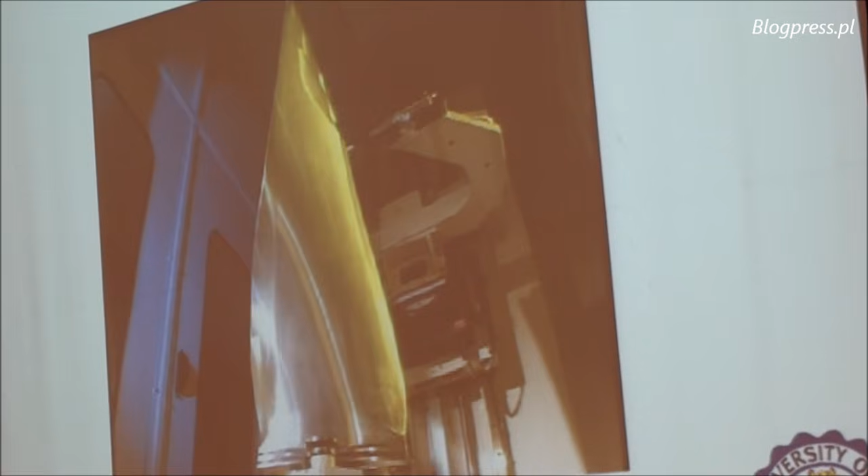This is required by the FAA, and you can see here the test that every jet engine has to pass. It's called the blade-out test for jet engines like the GE90. It costs more than $20 million. This particular test is for a Rolls-Royce engine and is conducted in England, but the same test is done by other companies like GE, Honeywell, Pratt & Whitney and others. As you saw, the test was very quick, just a millisecond.

Of course, we use high-speed cameras to videotape that, but even with high-speed cameras, we can only see a little bit of the action. It's very hard to measure, I think because of the energy involved in those tests. So you can imagine that basically the prototype of the engine, which is expensive on its own, is basically destroyed during this test. Now, as I mentioned, this is the required test for certification.

So companies have to do it, but they don't like to do too many of those tests. If they can limit it to one or two, they are very happy. If the test doesn't pass, they have big trouble, because then they have to go back to the drawing boards and continue making modifications to the design, slowing down the delivery of the product, which costs even more money. So what they do is over-design. That's normal. But if they over-design, the engine is heavier, and we all pay for that, because then the tickets are more expensive.

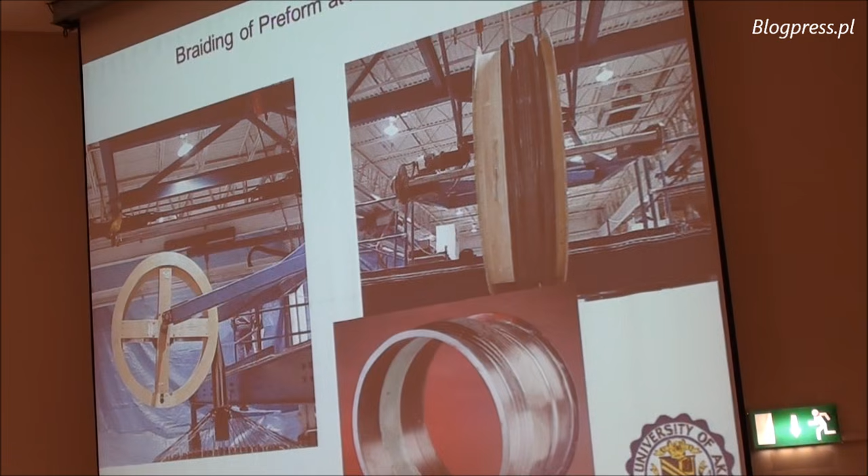So we have started to develop technology from the material point of view, that we have to characterize, understand, be able to describe mathematically and physically through a system of tests, and then develop the fabrication process that will be automated, so that the system can be done again and again with the same quality.

And here at the... oops, okay. Here it's... my laser is not working. Okay.

So the one that I was trying to shine is the containment, as you can see. Okay, this one. So this is the containment system, and basically it's flying with the engine, and it's a dead weight until it's necessary to stop this fragment of the blade to penetrate the engine, and of course to protect the wing of the airplane or a fuselage of the airplane, and make possible, even in such situation that the blade is broken, for the airplane to land.

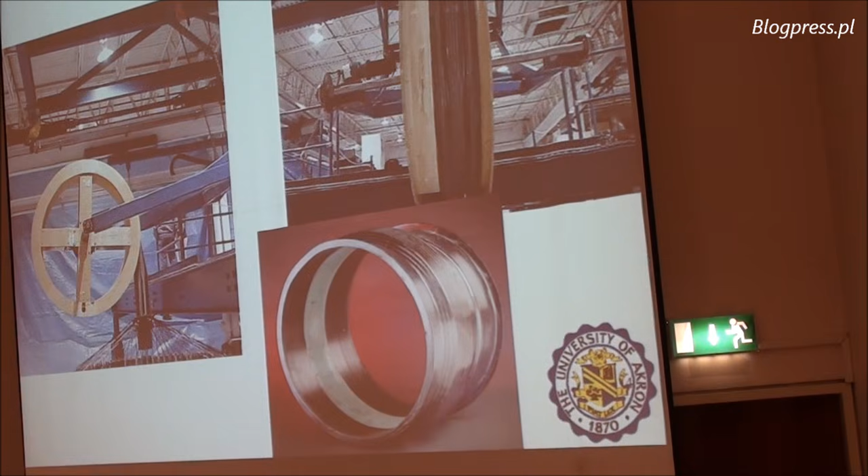In order to understand the whole system, we had to look into it from the material point of view, of the micro level, and meso level, and macro level, and also on the structural level. So this is the so-called multi-scale approach, and required to analyze and characterize the polymer itself that is used as a matrix in the composite, the composite itself from the micromechanical point of view, then understand the architecture of the material, which is the mesomechanical level, then go into laminate, which is the macromechanical level, and make a structure, which is the structural level.

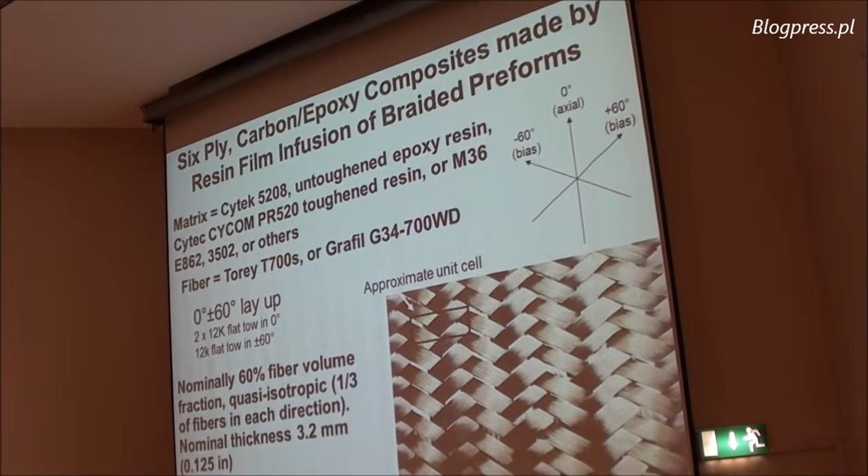We use different matrix materials and limited ourselves to Toray T700S fiber, which is Japanese fiber. And you can see architecture, and again, the same architecture is seen here in the sample, which has 3 directions of the fiber. 0 is embedded inside of these bundles, and plus minus 60 braided over and under through the system of braiding. So this, in mechanics of composite, we call it quasi-isotropic material. It means that from the point of view of theory, it's supposed to have the same properties in axial direction, which is this one, as in transverse direction.

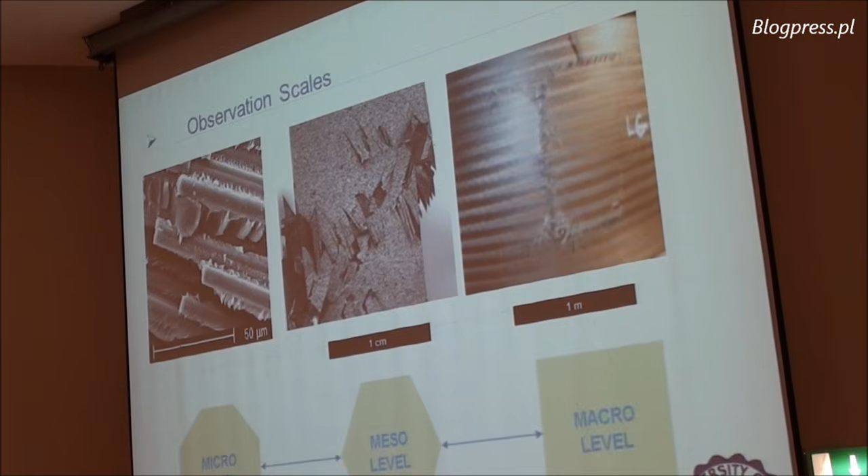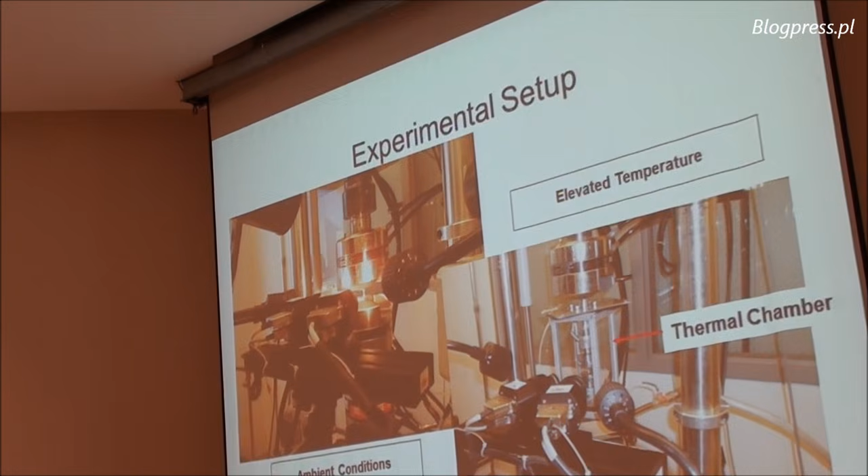Of course, when we test, you can see that at different level, we will focus on different mode of failure. We can see at the micromechanical level the adhesive or cohesive fracture of the material itself. We can see from the sample level the tension results, which looks like shear, and from the structural level we can see the damage due to application of the internal pressure, which makes the crack driven by the structure geometry of cylindrical structure itself.

So in order to characterize the resin material, we developed special small samples that we could get the results under tension, compression, and torsion for the shear. So we had a small cylinder, and we used a digital image correlation technique to observe the deformation of this material. I'm sure in your university you use digital image correlation widely. It used to be an advanced method of measurement, but right now it's very common, so I'm not going to discuss that.

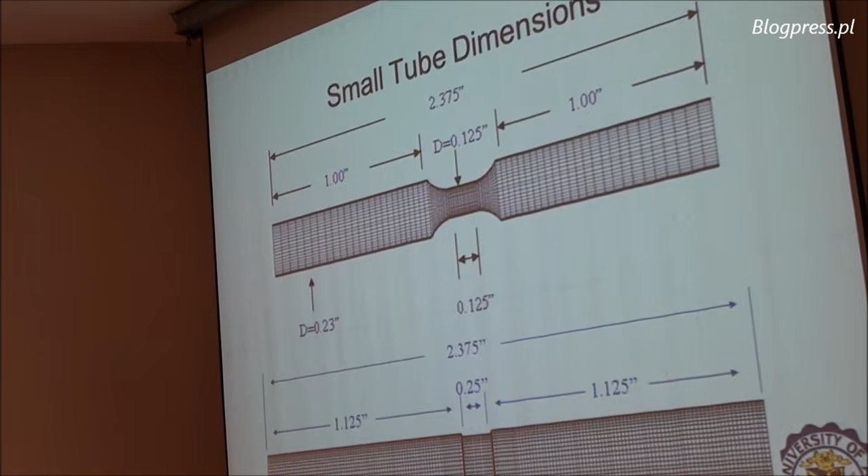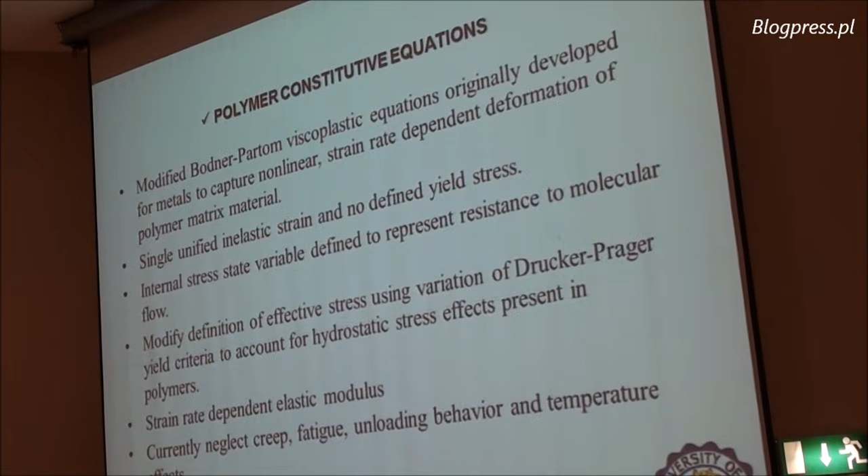Now, because of the viscoelastic properties, if you load and unload, you can get hysteresis of this test, which means some of the energy would be absorbed through just loading and unloading. And all of that is important because we eventually have to develop the constitutive equation that would describe this behavior of the polymer composite that we use in this

material application. So we use the modified definition of Drucker-Prager yield criterion to account for hydrostatic stress effect present in the polymers and strain rate dependent elastic, and basically this is some mathematics that describe the stress strain using the compliance matrix and the functions that are used in the constitutive equations. I'm not going to spend all the time, but basically this is quite simple for the constitutive equation system, but still has 7 parameters that need to be determined experimentally.

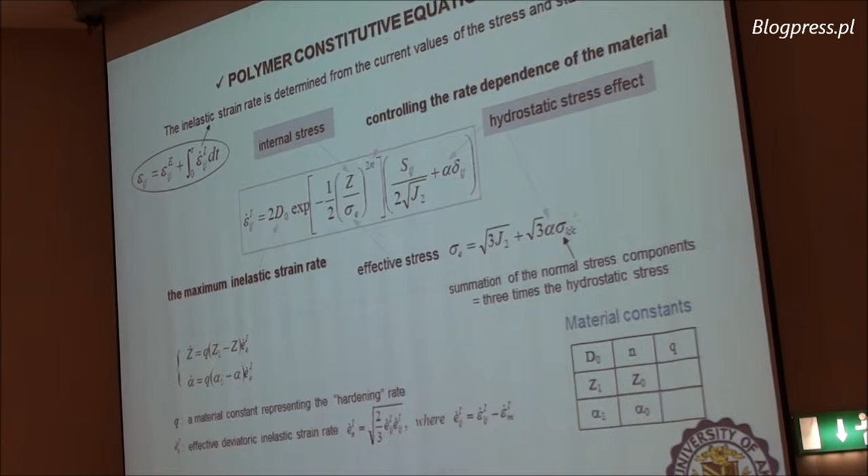And of course this is not finished. We also had to add some damage that is involved in the material itself as a matrix. So the damage is reducing the Young's modulus. You can see that the more the damage, the different slope, even at the beginning of the stress strain curve is obtained, and that needs to be related mathematically, and it was captured using the damage parameter, which is basically defined using Kachanov type of definition.

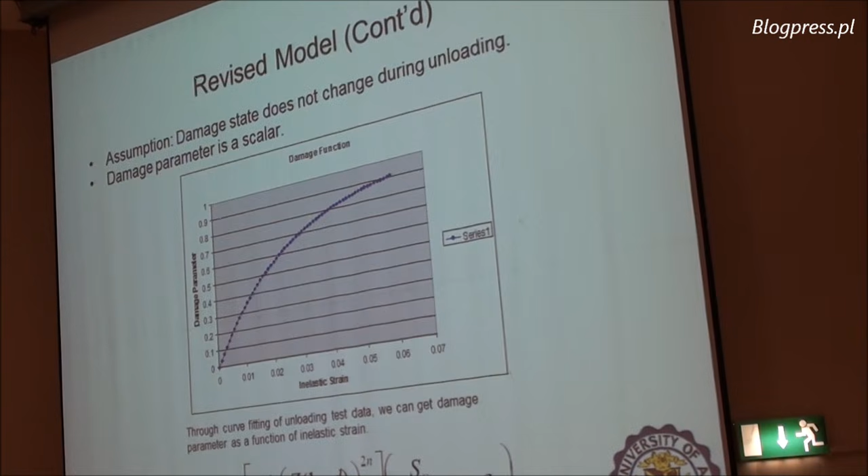The revised model is described here by this equation, where you have effective strain and damage parameter involved in this equation, and therefore you can have the sensitivity to the behavior of the material, not just as a virgin material as it is new, but also when it is damaged.

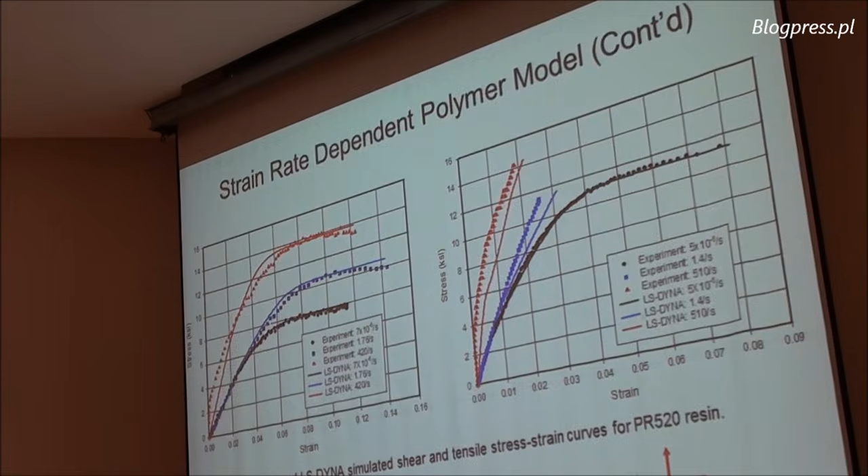And we developed UMAT for LS-DYNA, which is basically a system of steps that will incorporate this model into the finite element calculations. And the bottom line is to have experimental data and simulations, and convince yourself that yes, you capture the behavior of this material at different strain rates, and you have it that you can use, you can move on to the next step of the analysis.

One addition to the behavior of the resin material is that it unfortunately suffers aging during the lifetime application. So it means that when we produce the composite and we put it into an airplane and it flies and changes temperature from the temperature at the tarmac to the cruise temperature, which is very cold, and then lands maybe in Hawaii and it's very hot and humid, or in Dublin, which also could be very humid. Then all these conditions and application of different gases can

deteriorate the material behavior. So we were asked to use our laboratory, and we have a special environmental chamber where we submitted this material to the aging process, and we tested again and again after months, 2 months, 1 year, 2 years, 3 years, 4 years, and find out if this material is going to behave properly at the end of life. Because for the designer people, it's easy to get the properties of the material when it is produced. You can go to the laboratory and test just after fabrication.

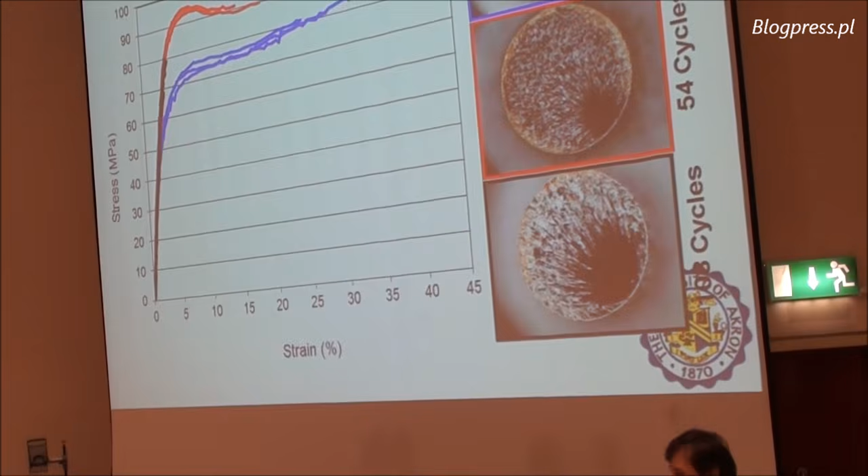But as a designer, you have to design the part, the structure, at the end of life, because it has to efficiently behave and do the job at the end of life, not at the beginning of life. So we found that indeed the aging is changing properties of resin from very elastic plastic to less plastic and to very brittle material. It changes also the color, as you can see through the cross-section of the broken specimen.

So once you understand the limitation and behavior of the resin itself, then you can go and make a composite, and then you go and try to test the composite. Of course, from the testing point of view, there are ASTM standard tests. I don't know what test you use here in Ireland, but in the United States, ASTM is the way that we follow.

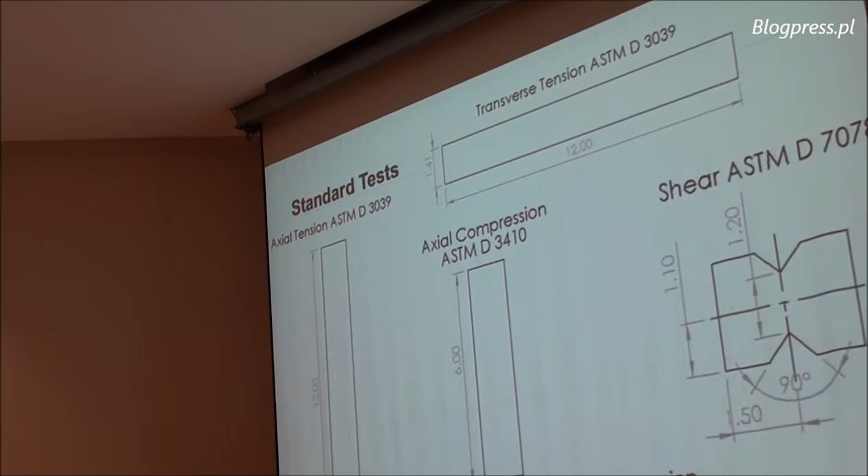Unfortunately, this is a coupon of the simple tensile test, and you can see that the outside edges basically cut through the bundles that are plus minus 60. And this has, we found, a consequence on the results of the tests. So we had to develop a new test outside of the ASTM standard, and we were looking first of all to understand the so-called edge effect, and you can see this edge effect in the DIC methodology.

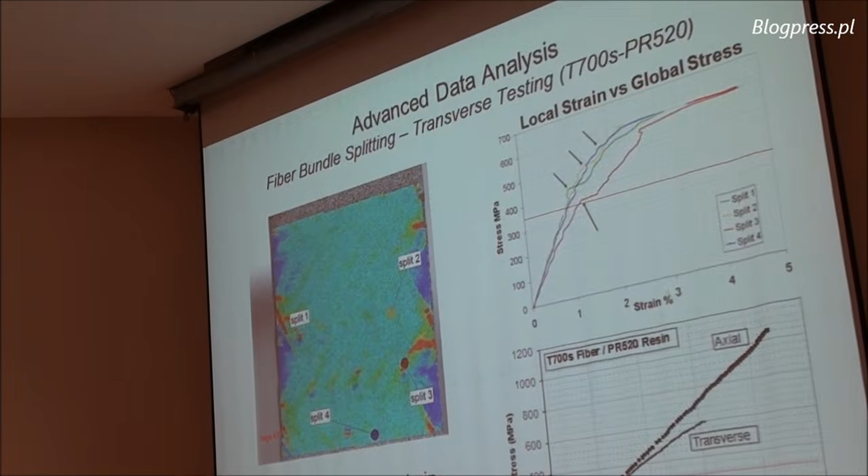This is an experiment where you can see the edge effect, which gives different stresses than they are inside. And of course, non-homogeneous stresses or strains are visible, like you can see maybe a damage, local damage, split or fracture or debonding between fiber and matrix. All of that can be overlapped on the global strain, but locally they produce a different stress-strain relationship, and they need to be known and somehow incorporated into the constitutive equation later in the modeling.

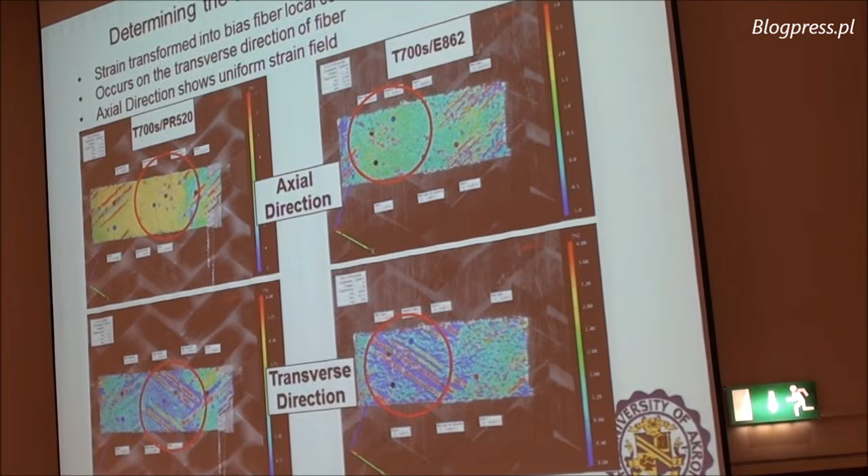So we spent a number of years to understand the different failure modes. We found through the thickness the splitting of the bundles that are shown circled, and we looked at the microscope, we looked at the bonding at the fiber level, and we found that even for the same fiber, but two different resins, which globally give almost similar behavior, the local stress strain can reproduce different damage progression or behavior of the material itself.

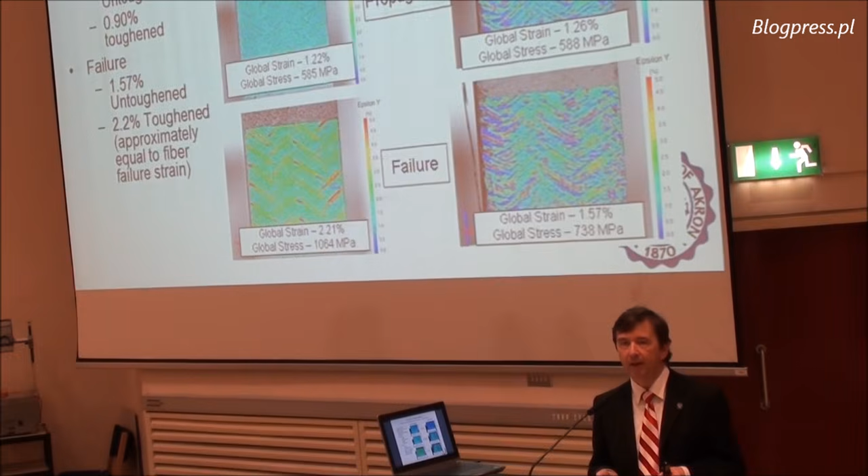We attribute that to the interface. Okay, we can have material with a strong interface that is on the left, and with the weaker interface which is on the right. So although we combine materials that physically behave almost the same, because of the interface the effect could be quite different.

And again, a lot of tests showing the mode of failure under tension, and these are pictures from the high-speed cameras that show how quickly, this is 40,000 frames per second, so within 12 frames of the 40,000 frames per second, you can see the damage progression. So you have to capture that very quickly, otherwise you don't see that at all.

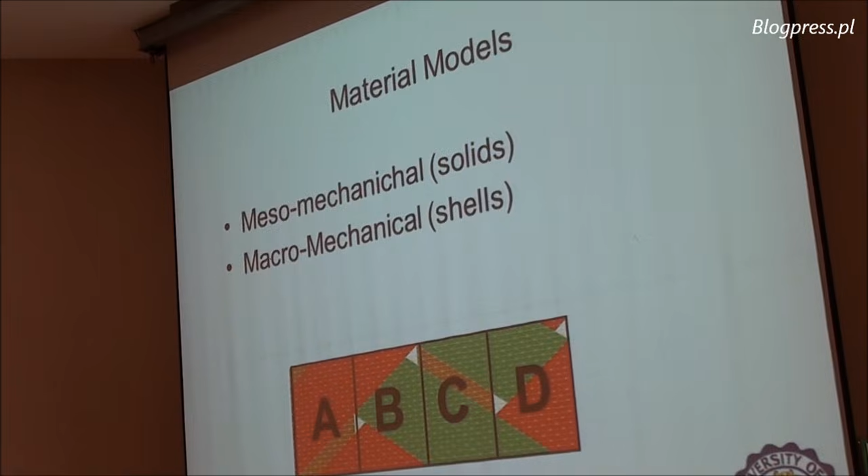And then all these tests are put together in the mesomechanical model, which is shown here, and macromechanical model. For the macromechanical model, we divided the braid, the so-called representative volume element, into subsections A, B, C, D, and in subcells A and C there are fibers in plus, minus, and 0 degrees orientation, and B and D are plus, minus 60 different orientation.

For the mesomechanical model, the idea was to use solid elements. For the macromechanical model it was to use shell elements, and of course a shell element will lose some of the information that the solid element can provide, but for the structural analysis the shell element is the proper way to do it, not solid elements. So again, contributing this to the model with the cohesive element used to measure the strength of the interface. And of course, those people who understand fracture mechanics know mode 1, mode 2, mode 3, and they are all captured in the cohesive element.

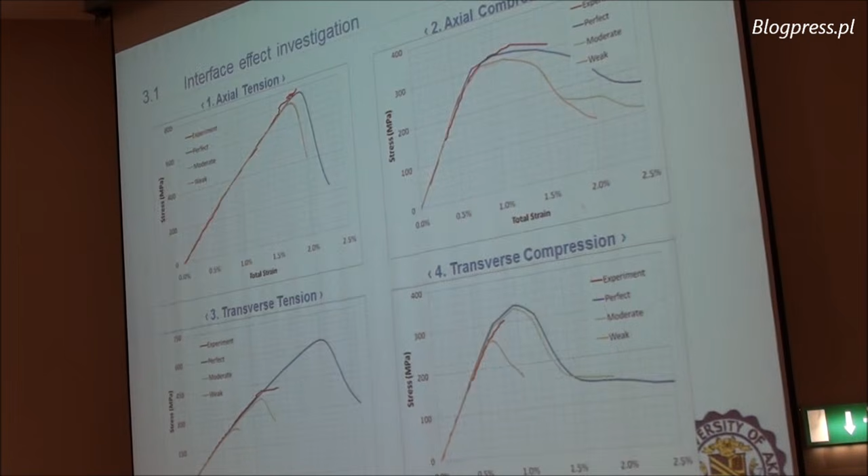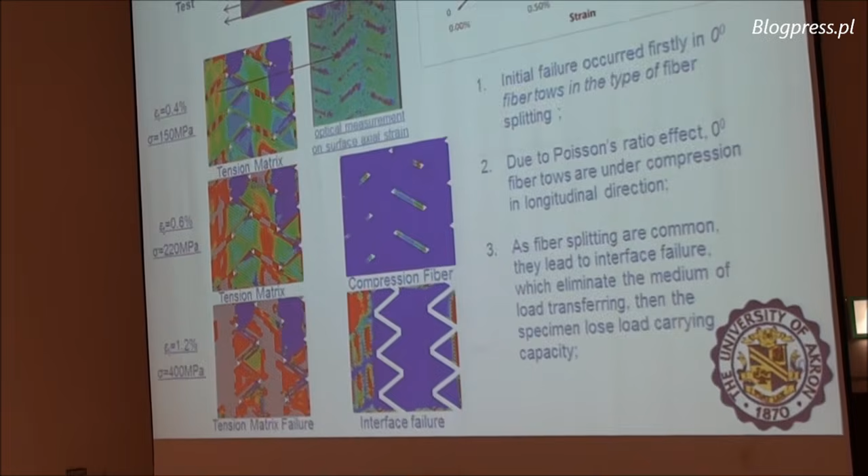And the bottom line is that you then have a significant number of parameters you can adjust to make sure that the simulation, as you can see here, for axial tension, transverse tension, axial compression, and transverse compression will capture the experiment as measured in the laboratory. You can also look into the analysis and try to understand if you capture not only the slope of the stress-strain relationship, but also the damage, and this is on the left simulation and on the right experiment, which indeed captures those failures that occur in the material itself, and again other tests are shown here. Same thing you do for the macromechanical model, and eventually you can get the tests and samples that give good results.

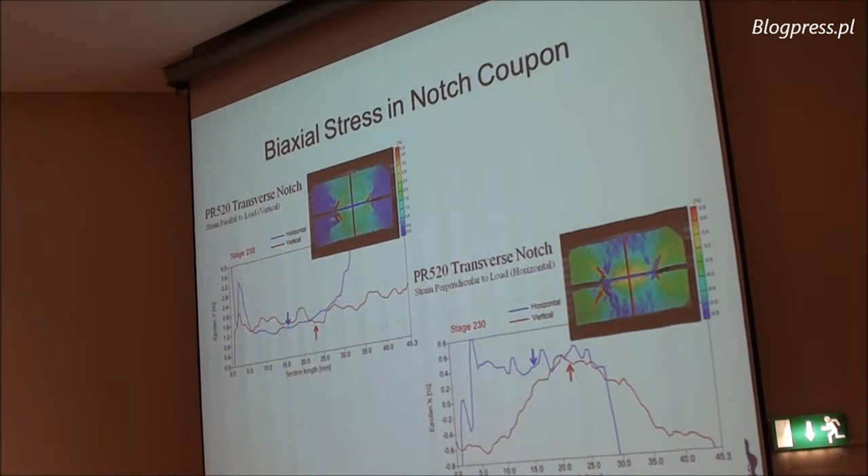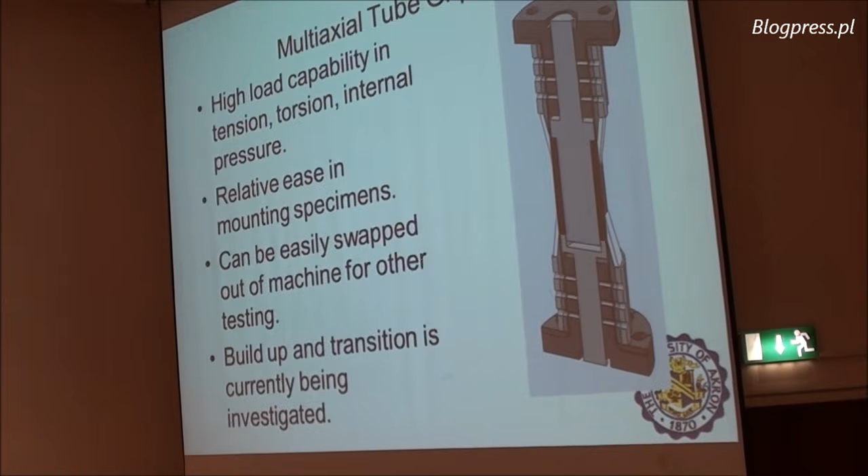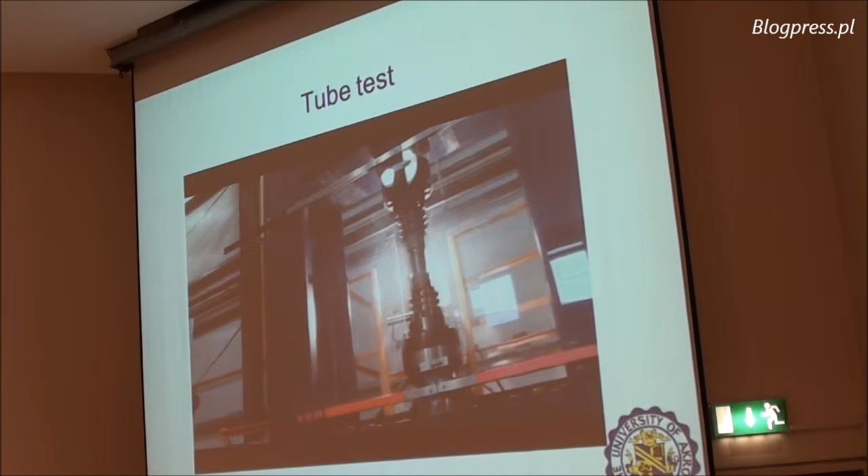This is showing some video of making the gripping area, which we had to overlap with extra material and then machine it. So that takes a lot of preparation time for each tube, and you can see now the test itself in the machine. You can see my graduate student sitting behind and controlling the testing process. And pretty soon you can see two cameras measuring through DIC these spots that are painted on the surface of the specimen, which are post-analyzed in the computer to show the strain fringes.

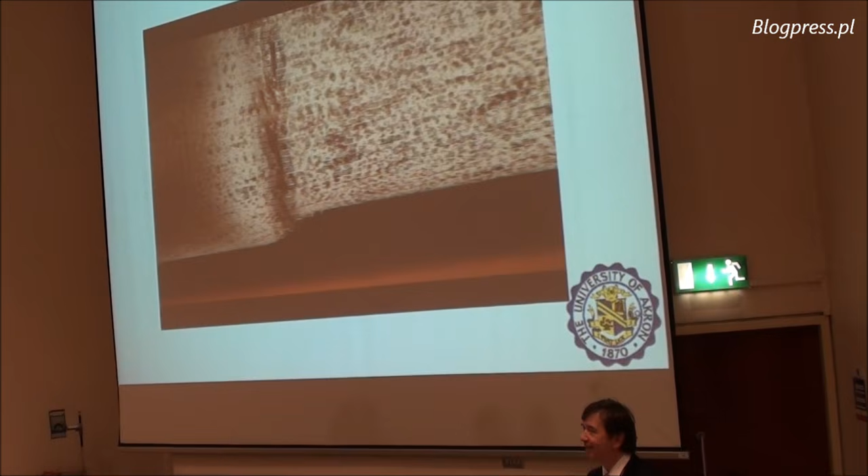And I'm just shaking hands with my camera, waiting for test results, and worrying that if it explodes, because it may explode, I will be full of shrapnel. But what we do for science, right? We devote our life and make sure that we can get results.

In this case, it was safe because it debonded at the gripping area, so it didn't break, and the results need to be repeated anyway later on. So in terms of static tests, these are the capabilities of our laboratory. We can do the ASTM standard tests or non-standard tests, but we also have the gas gun that you can see here, so we can test the material under impact conditions. That will give us the larger plate that is impacted under the... let's see if I can.

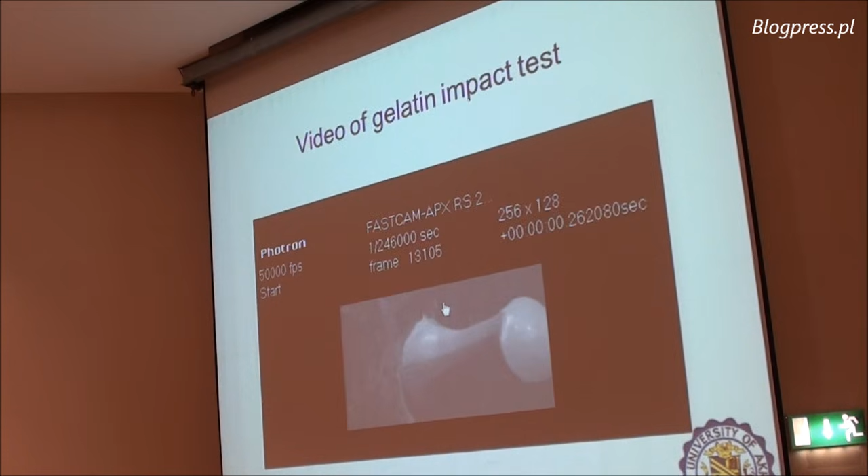This is supposed to be a video, so here it is. So you can see the gelatin is splashing into the material, and we have to characterize the projectile. In this case, it is gelatin itself. Then we look at the gelatin using the DIC method, and then we can apply the DIC to the

test itself. This is an interesting test because it will show how aluminum, the original material, will behave under the gelatin, which is the so-called artificial bird. Well, here you are, it breaks through, and not only does it break through, but it rips open a huge hole. So aluminum, as a standard material, is very dangerous because yes, it is elastic-plastic, but if it breaks, it can open a significant hole in the engine, and therefore those cracks are not arrested.

And you can see on the left the deformation of the aluminum before it fails, at a little bit higher velocity, and it failed, and the failure is definitely very detrimental. Now, the composite offers more crack resistance, so when you have a failure, you have local fiber breakage, but even if you have a, let me see if that would show.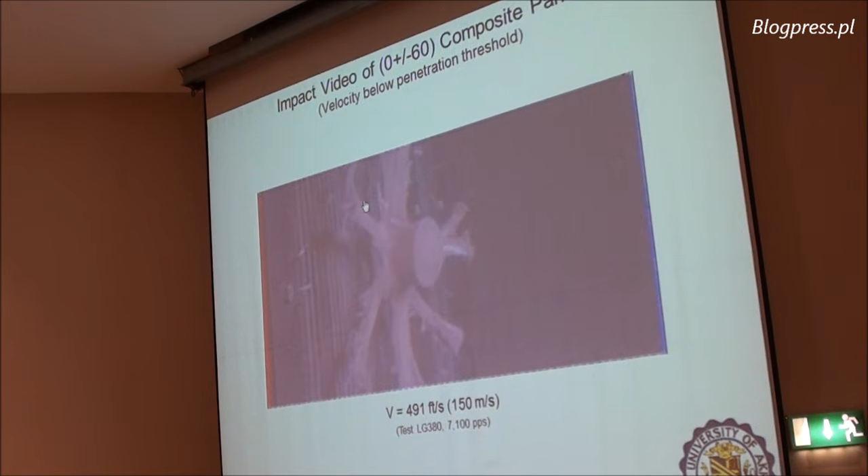Even if we have the application of this material, you can see it is more elastic, it is gentle, it behaves like a spring, and therefore saves itself. And it was interesting to me that common sense would be that if you have thicker material, you have more protection. In fact, in composite, the thinner material, to a certain extent, gives you more protection because it's more elastic, and therefore the damage is not as strong, and that was analyzed through all this

analysis. If it fails, of course, because you can always apply force that will fail it, the damage is much more localized. It basically breaks and opens the gate, and the projectile flies through, and therefore the damage is not as bad as one would imagine.

You have here the whole matrix of damage, and you can see that for the same fiber, just by changing the matrix, the so-called V50, which is the velocity of penetration, can be significantly different due to the interface strength. In fact, again, common sense would tell us that the stronger the interface, the better.

In fact, in impact, the weaker the interface, the better, because the material starts to spread the forces through itself by delaminating or decomposing itself, and fibers, by pulling from the matrix and from the other fibers, can absorb much more energy, therefore it can get much safer for the experiment that we use.

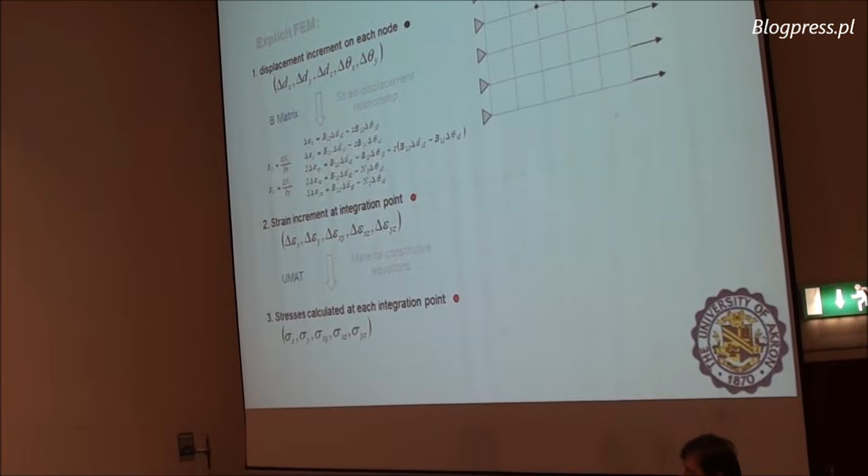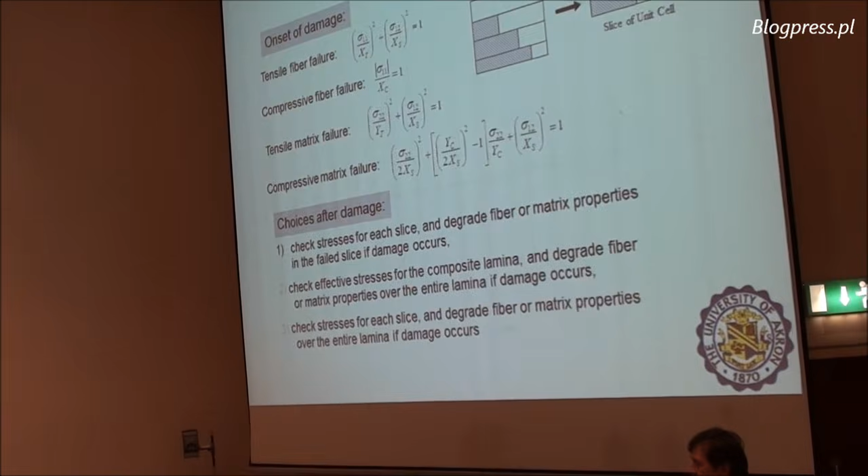This is the system of UMAT applied at the integration point, which basically takes the behavior of the resin and failure using the micromechanical model, and these are the results of the simulation with respect to experiment, which are satisfactory for us. And again, you can see the damage model using the so-called slice model that we use to incorporate and get the final results.

Once we can get the results not only for the deformation, this is experiment, this is simulation, but also for the shape of failure, then we are very happy, and we can start making changes to the orientation or architecture of the composite. And over here we have plus minus 60, and we have the so-called butterfly shape of the damage. Here we change to plus minus 45, and a completely different shape of the damage, which was predicted first and then tested, and indeed it was confirmed that the damage is like that.

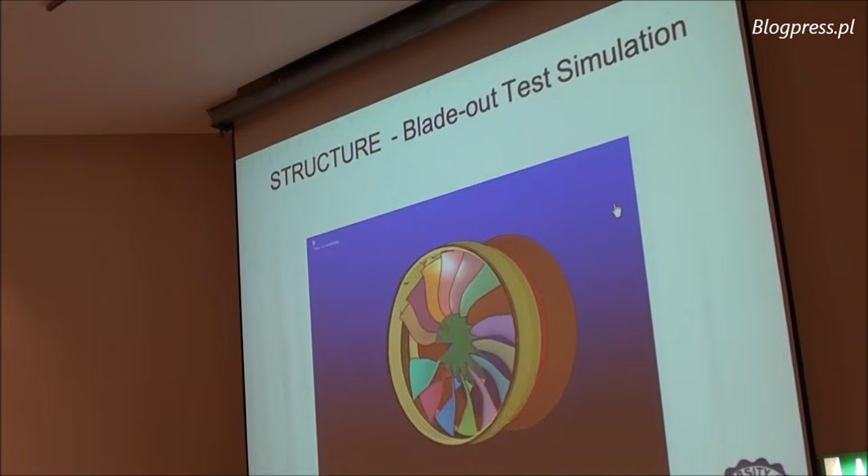Now the result of this is structural analysis, and then a $20 million test can be done on a computer, which is almost free, because this is the cost of graduate students, and you know how little we pay graduate students for their work. So it's indeed the time of computers and simulations, and we can get more information from simulation than from the experiment, and therefore the FAA is very happy,

the aircraft companies and jet engine companies are very happy, because now they can make modifications, they can come closer, they don't need to over-design the structure, and they can save more weight, and we were able to save 30% of the weight of the jet engine by using this technology in terms of composite materials, and also using our simulation method, which is a big success for a small jet engine company like Williams. They lost a contract for small business airplanes because of 2 pounds overweight of the jet engines.

Then they came to us, they use the same material for their jet engines, they save enough weight, and they are competitive again on the market. So by doing this, we can save and allow companies to compete and save billions of dollars in terms of production over the long term.

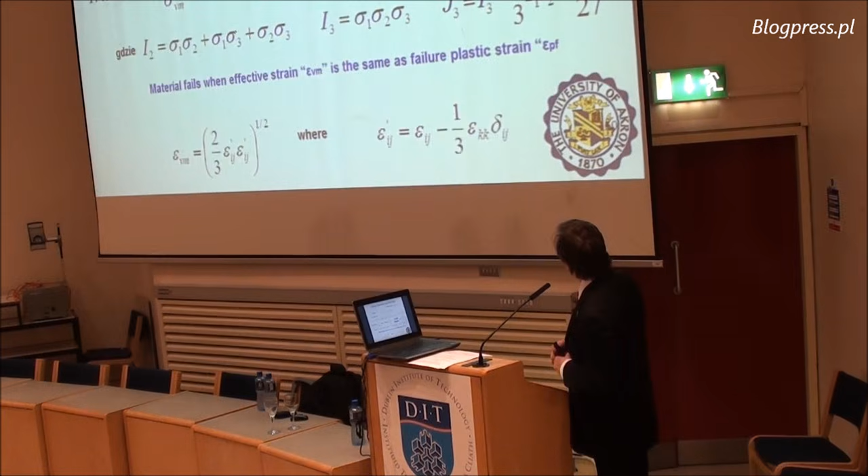which is the effective stress. So, of course, this can all be described using invariants, and again, I'm not going to spend too much time on the mathematics, but I just want to point out the triaxiality and the so-called Lode parameter. This one, the Lode angle, defined using the J3 invariant, is used to describe the behavior of the aluminum.

So the aluminum is isotropic, but we found that based on different triaxiality, it behaves at failure in a different way. And this can be shown by experiments under tension with grooves on the left, tests 1, 2, 3, or a punch test. And of course that can be done, similarly to composites, using different strain rates.

So what is interesting is that we can see at 20C under different rate conditions, the red is the fastest, that the faster we apply load, the stronger the material is, and also unlike in composites, the maximum strain is not deteriorated, which is very, very good for aluminum.

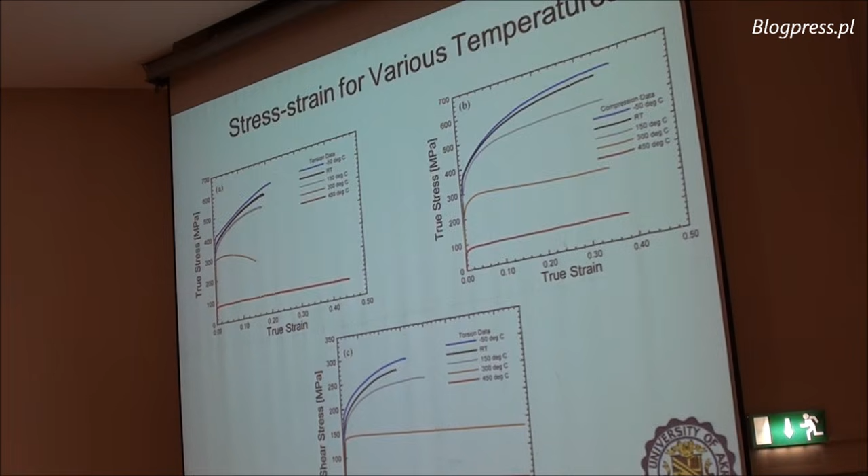Now also for the same strain rate but at room temperature or low temperature especially, the low temperature is the blue, minus 50C, which is the cruise temperature of the airplane at 30,000 feet. Or room temperature, you can see that again the colder the material is, the stronger it is, and still not losing any of the strength.

And we can again observe experimentally, and we developed a special specimen. This is a special specimen with a punch, and that punch expands the size of the specimen, at the same time pushing the bottom and therefore producing a three-dimensional state of stress at the bottom, tension in X and Y, and compression through the thickness. So this is the negative so-called Lode parameter or Lode angle and negative triaxiality.

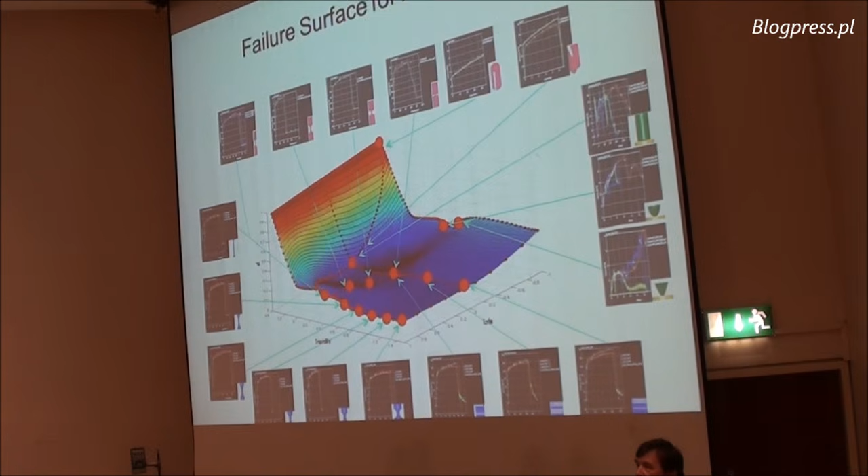Now, all of these tests shown at the outside of this slide are needed to produce the so-called failure envelope. So this is the failure surface for aluminum that shows how dramatically different failure can be depending on the combination of the state of stress that you apply to this material. Once this material is characterized, it is put into LS-Dyna as a so-called tabulated material model 224, which means that the experiments are completely embedded in the numerical model.

And we can see that we can capture the ballistic test for different thicknesses of the plate on the left and compare with the experiments on the right very accurately. Same thing for tests that are different than ballistic. And I used this material to find out whether it is brittle at higher velocity. So we use a sabot, and this is our gas gun in our laboratory, and you can see the result of the impact when the sabot is accelerated in this tube and impacted into a very thick wall. So this is like a rigid wall at the speed of sound.

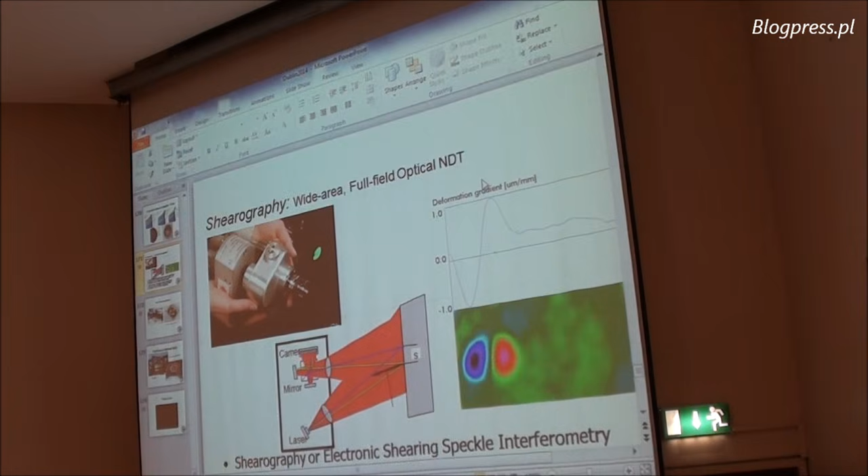So from this you can damage this aluminum completely, but there is no brittleness. The material basically is very plastic, and we can also capture that using material 225. So all of these tests will allow me now to go to the next step of my presentation, which basically would be applying all these material models, both aluminum and composite, and because wood is a composite material, we can get the same.

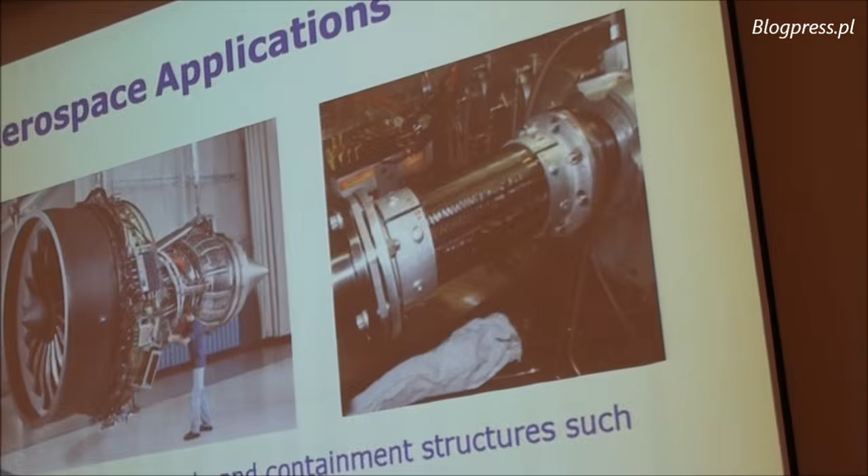And at the beginning I showed this is the new GEnx engine that was produced by GE that is used as one of the options, in addition to Rolls-Royce, for the Dreamliner. And of course it is available for other airplanes as well. The same material, if it is good, is now designed and used for helicopter shafts, so in the future there will be more applications. But let's go to the problem where I would like to apply my knowledge, the methodology that I described here, which involves the crash of the Polish government airplane, which happened on April 10, 2010, where the President of Poland and many officials died.

And I'm sure you heard about that. So, based on this methodology, which by the way was used also to analyze the crash of Shuttle Columbia before, I knew that this would be a good methodology to use to analyze some aspects of this crash.

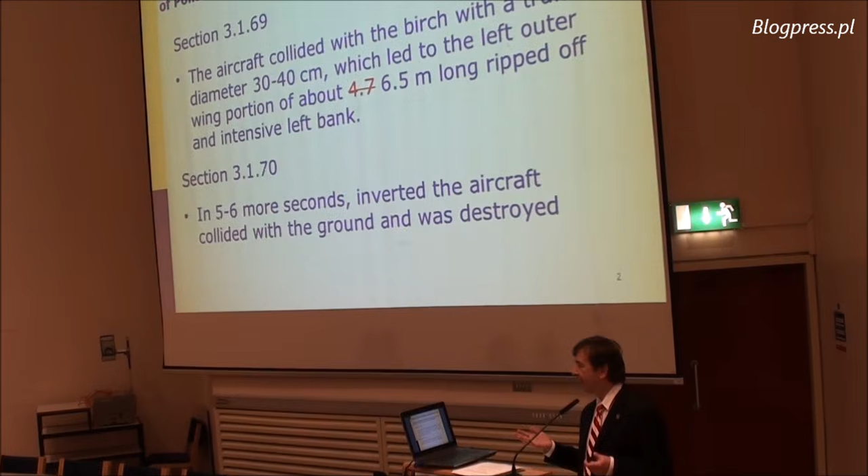So I was waiting for the official report, and you can read from it, in section 3.1.69, that the aircraft collided with a birch tree with a trunk diameter of 30 to 40 centimeters, which led to the left outer wing portion of about, first they say 4.7, then they measured 6.5 meters long, being ripped off and an intensive left bank. In 5-6 more seconds, the inverted aircraft collided with the ground and was destroyed.

We are talking about the aircraft Tupolev 154, which is similar to a Boeing 727, about 40 meters wingspan and 50 meters long, about 100 tons. Based on this reading, this is about 6 or 5 meters from the ground, as measured by the investigating committee. And they say that at this location of the birch, the airplane lost a wing.

And of course, when they lost the wing, you'd anticipate the plane would lose some energy, because they lost the balance of the lift force, so it makes sense that it goes down. But somehow then they said, based on the black boxes which measured the height, that the airplane was able to go around, starting to climb again without that wing.

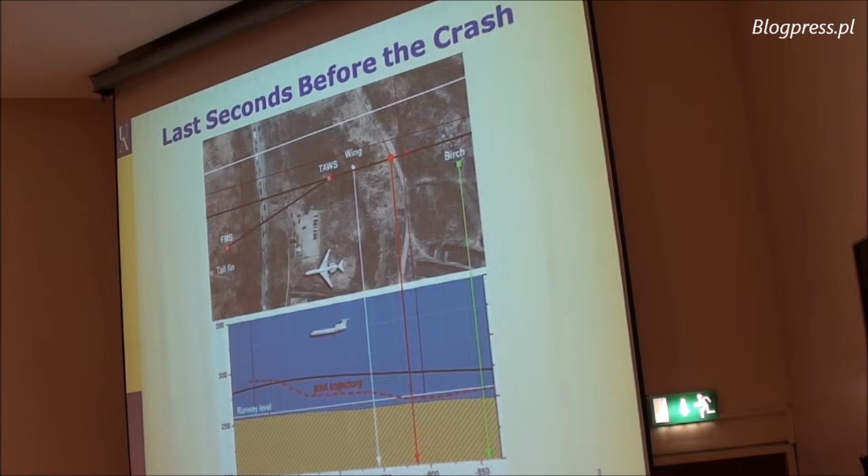And at this location, something happened, because this is the horizontal trajectory. By the way, this was supposed to be a real trajectory, but it was incorrectly directed by the ground navigation people, who directed it on the wrong path. But anyway, something happened, because the plane that was flying straight turned left sharply, and at this location lost all electric power.

That location, you can see, is about 30 meters above the ground, and this is from the Russian report. So you think about this and say, it doesn't make sense that an airplane going down without a wing, which makes sense, is now able to go up again. And you calculate - anybody can find that the airplane is flying 80 meters per second.

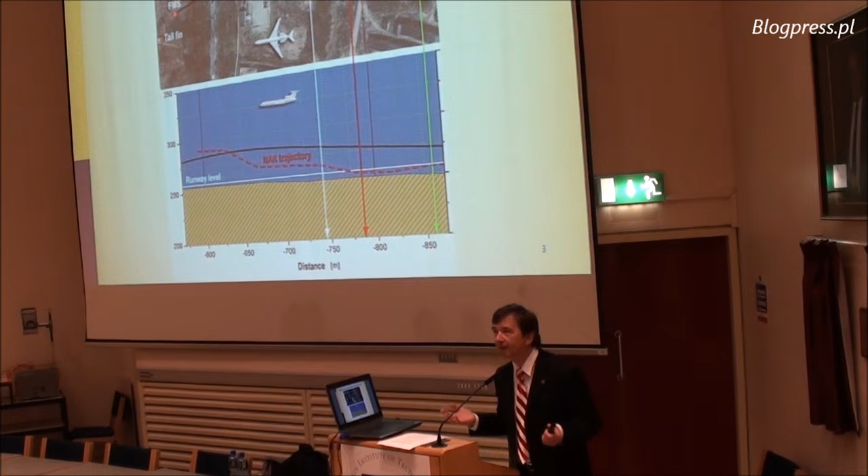You can see the distance in meters, so you can calculate the change of velocity, and you find that at this location where the velocity changes from going down to going up, the g-force has to be about 10 G. So it is physically impossible, because even fighters cannot get G10, and big airplanes with G10 would just disintegrate at that location. So you would say that something is wrong.

And we've been looking into this for many years, not only us. Recently in Denmark, a Danish expert, Glenn Jørgensen, made calculations, and this information is on YouTube. His lecture was in Denmark, done in January.

You can see that, in fact, he had the same motivation as I had - I wanted to prove that the original report is correct, and I just wanted to verify that with my methodology, and he also wanted to do that. And when he put in his time and I put in my time, we found that the report has no sense whatsoever.

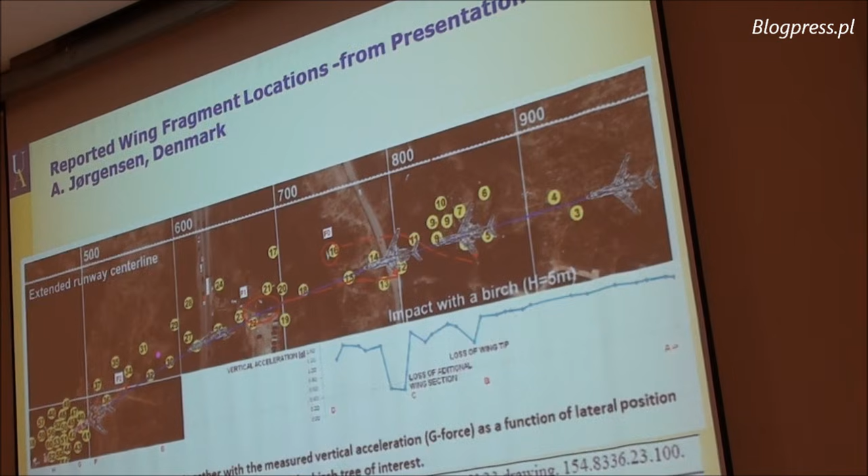So what he's saying is, okay, this is the location of the birch, and let's say the airplane lost 6 meters of the wing, and one wing is 18 or 19 meters long. So 6 meters is about a third of the wing, and that part of the wing is here - it's flying from the left somehow to the right of the center of mass of the airplane, and landed in the bushes and trees, visible through the satellite picture.

But he also found that other parts of this wing are in shrapnel shapes here, and this is the location of the first contact of the airplane with the ground. So the question is, what could happen that the other third of the wing is in shrapnel form somewhere in the middle, when the airplane was definitely still flying, because this is the mark of where the airplane first touched the ground.

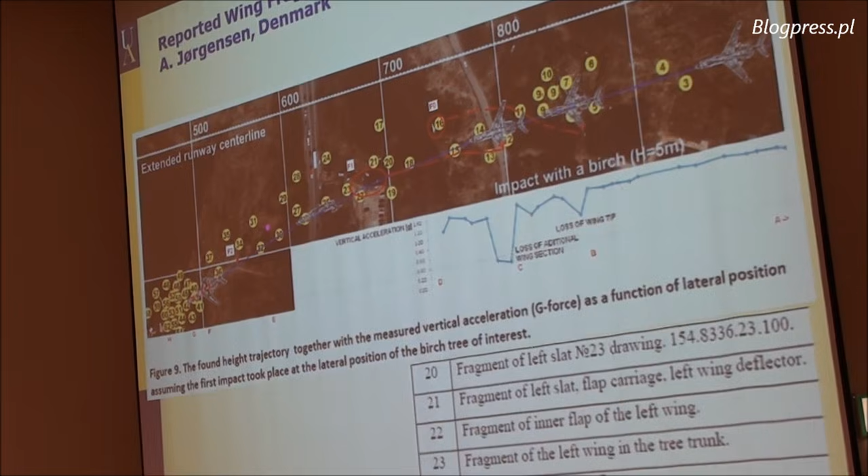So he also looked at the black boxes, and he found that at that location, a little bit before the first and second debris, there are two dips in the G-force, which could be related to the loss of this wing, and therefore loss of the lift force.

We also found, through analysis of the satellite pictures, that until now, almost 4 years later, no person from outside of Russia has any access to the debris of this airplane. Although it was a Polish governmental airplane, it is still in Smolensk. All the black boxes are still in Moscow, and nobody from outside of Russia has any access to the originals. There are some parts smuggled by people, which happens, but officially they are not available.

So what we found is that on the 11th of April, this is the part of the stabilizer, and this is the location of the first touch of the airplane. You can see the grooves done by some parts of the airplane in the ground. This part, from the 11th to the 12th of April, was moved by some unknown forces by 50 meters. So we asked the Russians what happened, and they first denied it, saying this was the original location. But when we presented pictures from the satellite, they eventually agreed and said people were trying to steal those parts, and militia stopped them and dropped it there. So we asked, why does the official report mark the new location, not the original? They didn't answer, saying this was a rude question. So they don't answer rude questions.

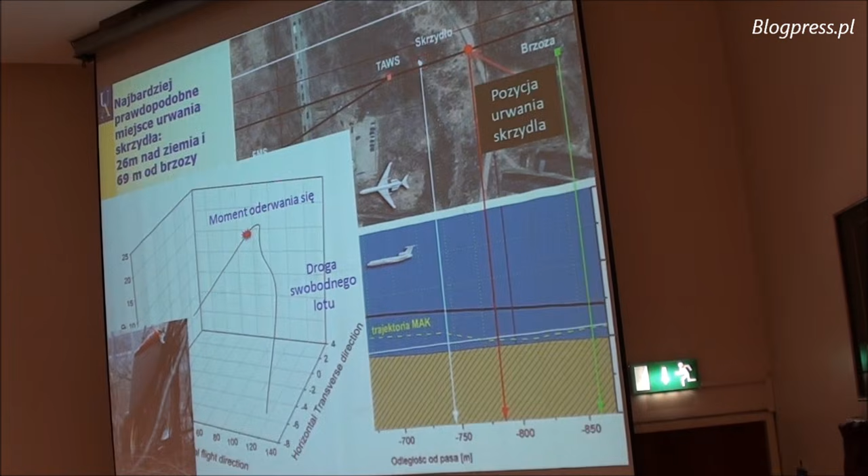Another scientist found that the TAWS measurements from this airplane were sent to be read in the United States, and we have access to that. This was one data point we had direct access to, and that TAWS gave a different vertical trajectory than the Russians showed. The original Russian trajectory supposedly had the airplane 5 meters near the ground, but TAWS shows the airplane never touched, never hit this tree at all. It was increasing height, so the pilots said we are going around, we are not landing, and they started to execute this go-around decision. However, something happened later that disintegrated the airplane in the air.

Coming back to Jorgensen, it's interesting because his analysis using aerodynamics is able to work back from the location of the first mark and find the trajectory, and he independently confirmed that the TAWS measurement is correct. In other words, if the airplane were at that location, it would not be able to reach the final destination itself. In order to get there, two things must happen. First, the airplane must be higher, and this was also compared by Dr. Kowaleczko, who did independent calculations and found 11.3 meters above the ground, which is way different than the 5 or 6 meters stated originally, and which agrees, by the way, with TAWS measurement. Also, Jorgensen says that in order to make that sharp left turn, you have to lose two-thirds of the wing. So indeed, you cannot just lose one-third of the wing, you have to lose two-thirds, which you can see from the debris laying before the location of contact with the ground. So all of this started to agree, no matter who did the calculation, either me, Akron, Jorgensen in Denmark, or Dr. Nowaczyk in Baltimore. Everything agrees. However, nothing agrees with the official report that was presented to the world.

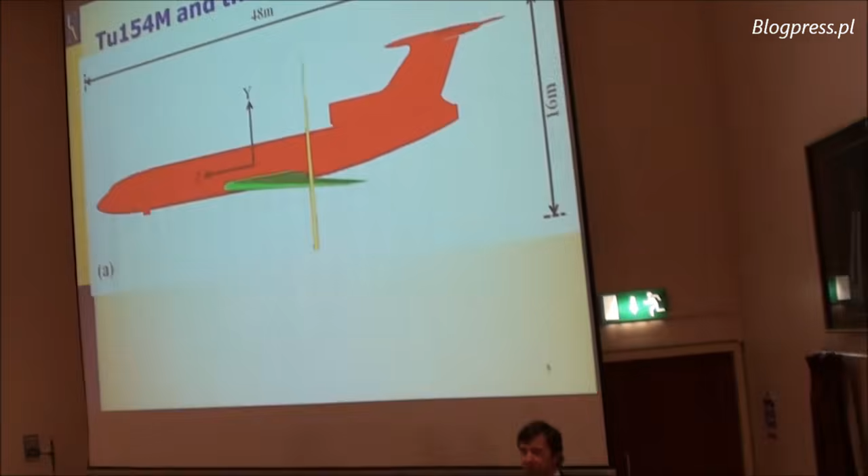Coming back to my methodology, as an engineer I can build a model—this is a model of the Tupolev 154. You have some measurements; you can see the yellow trunk of the tree according to the official report, which is the input data.

I also had to give the properties of the material. Professor Cieszewski from the University of Georgia received part of this tree from Smolensk and tested it, finding that it is indeed a regular birch tree, not anything stronger than any other birch tree.

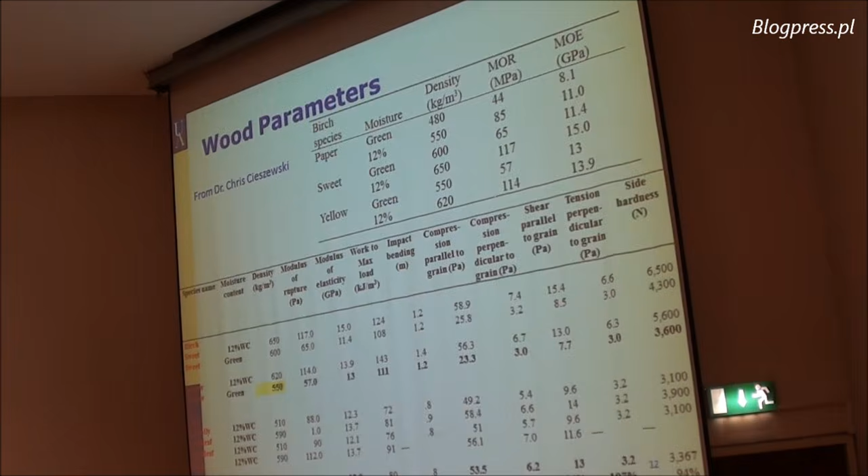In fact it's weaker, because it grows in a very wet area and therefore has a lot of water inside it. I was able to put together the properties and dimensions of this tree.

So as an engineer and scientist, I bought some of the birch tree, tested it, and created an orthotropic model. Before my test I used a linear model with properties from the literature, but testing showed this material is more non-linear, so I used material 143, part of the newer non-linear material model available for trees.

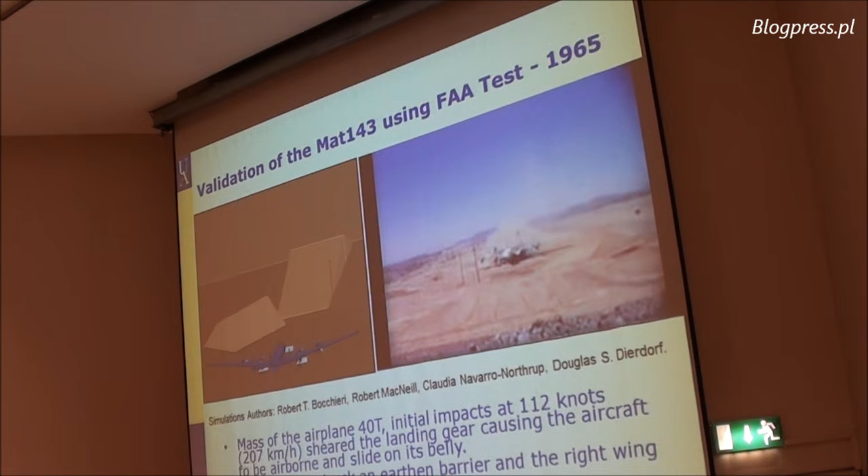Independently, Professor Bocchieri in California used the same material model 143 for testing of this experiment. You can see a Constellation airplane, which is much older—this test was done in '65, with two electric poles cut by the wing of this airplane.

The airplane, incidentally, is much lighter—half the weight of the Tupolev. Anyone who designs airplanes knows that wings are designed according to the velocity of the airplane and its weight.

So if your objective is to have an airplane that is flying much slower, which was the case of the Lockheed Constellation, and much lighter, then the wing must be much lighter and weaker as well. In fact, it has only two spars, front and back, and has the truss instead of ribs. So it's a very light structure, and indeed, despite the fact that this wing is much weaker, both of those poles were cut without any problem. As you can see, debris flying through that wing.

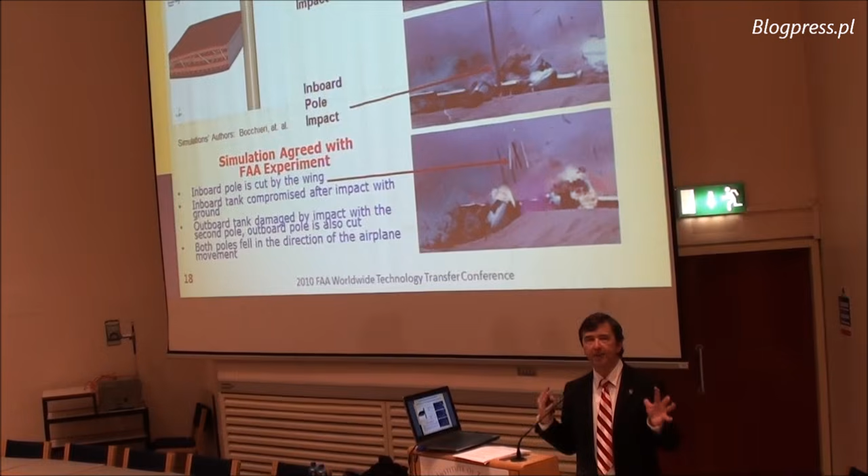Of course, this experiment was not designed to produce data for a crash of the airplane 30, 40 or 50 years later, but it was done to analyze the spillage of the fuel. So they put more obstacles, the ground obstacles and big stones, to rip off this wing, to spill the fuel, to measure the fuel. And the report of this test is on the internet, Bocchieri, you can look into Bocchieri's. And he used the same methodology as I did. So although we don't know each other personally, we use the same methodology because it is available.

Now for the aluminum, we first use a bilinear material model. We use Johnson-Cook, which is a strain rate dependent model, and recently we use this tabulated model, which is the most accurate, that I already showed before here. So now, what is interesting is that this test that I mentioned proves that this material is very plastic.

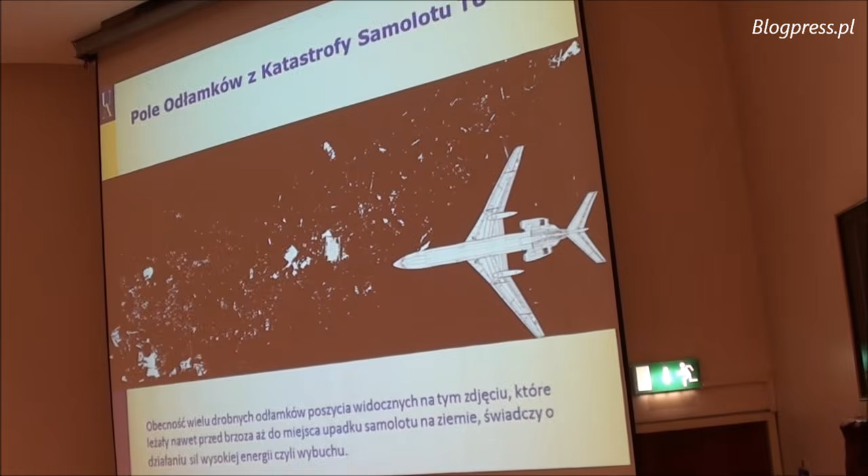But if you look into the field of debris, you have thousands. In fact, we got a report recently done by archaeologists that they found 30,000 pieces of debris in a certain area, not the full area. And debris are already found before this birch tree. So how can you find debris from the airplane before first contact with any tree? And also from the location of the tree all the way, it is a rain of parts, as I showed you, this wing part, the second two-thirds of the part, and the debris at the location are shown here through this satellite picture.

Well, Dr. Śledziński says that the more debris you get, the higher energy is involved during the damage. So we calculated, of course, and due to the fact that the airplane was flying 80 meters per second, which is 270 kilometers per hour, which is not high velocity for an airplane, and it landed from only 30 meters, the energy is not sufficient to disintegrate the airplane into small pieces of that nature unless it was explosive. So the conclusion was that there must be explosives involved.

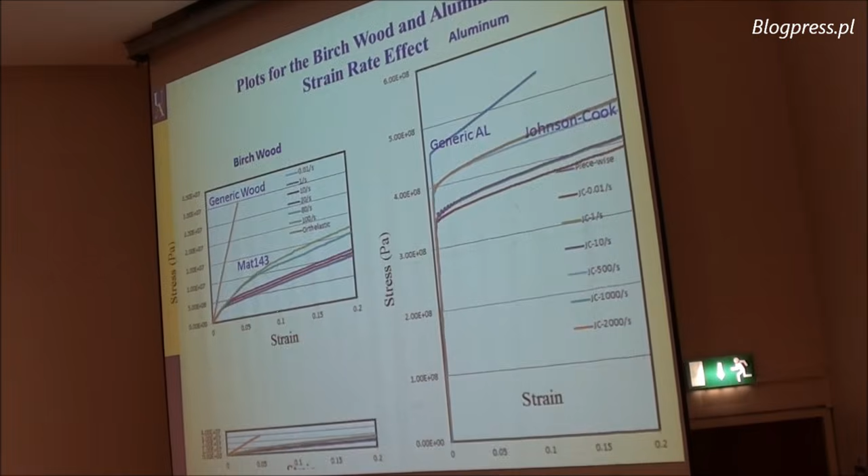Again, if you look into the stress-strain curves of different models that we use, like Johnson-Cook or bilinear, or this tabulated one, together with the material model used for the wood, the generic orthotropic model or material 143, if you squash this to show the same vertical scale, you can see how weak the tree is in comparison with aluminum.

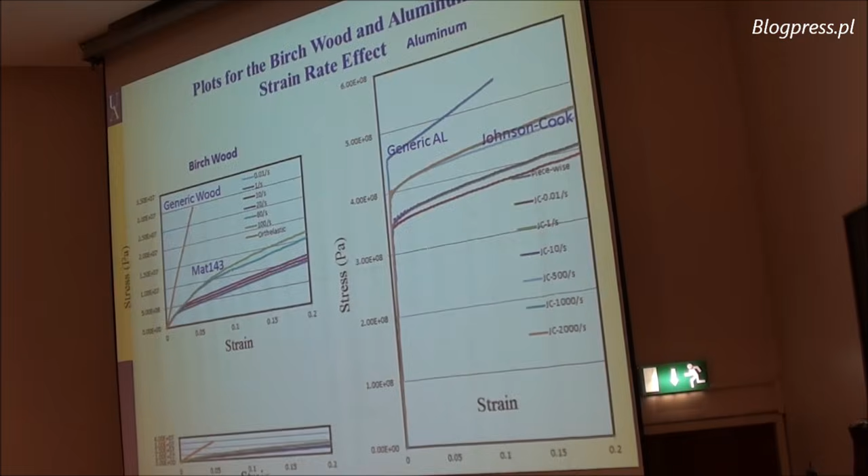I hope you saw the airplanes that hit the World Trade Center on September 11, during the terrorist attack, and the airplane went inside of the building. On the outside of the World Trade Center there are steel columns, so the aluminum was able to cut through the steel columns. That paper is written by Tomasz Wierzbicki and available from MIT on the internet, so you can read how it is possible that aluminum, which is 1/3 of the strength of steel, can cut the steel columns at certain velocity. So of course, if aluminum can cut steel columns, which are 3 times stronger, why is there any problem to cut the tree? This is the comparison on one scale of the tabulated model and the birch tree.

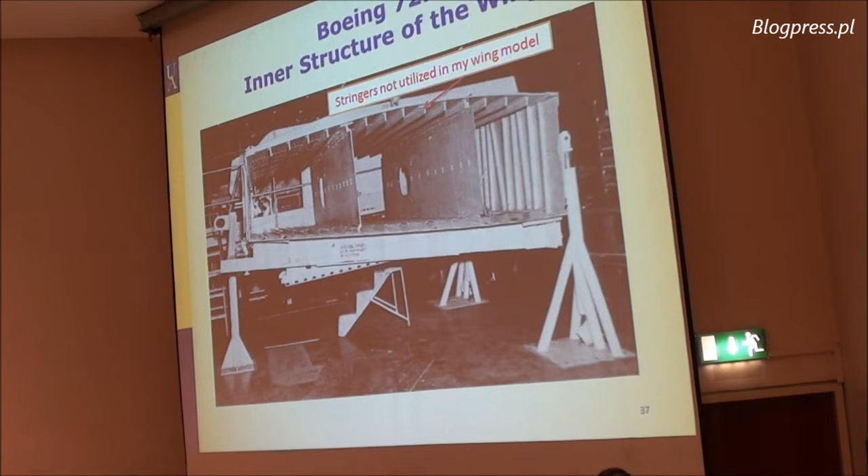So again, coming back to our model, we use the structure of the Boeing 727, but we didn't use so-called stringers because I wanted to have my wing weaker. To be more conservative, I wanted my wing weaker, and I used a tree stronger, with knots, about 4 times stronger than it really is.

Because I don't trust the initial condition data, I use so-called parametric initial conditions to change the velocity vectors from 77 to 80 meters per second horizontal, from 0 to 19 meters per second vertical. With the known mass of the airplane, the birch density I changed from 700 to 1000 kilograms per cubic meter, and I changed the location of the contact between the birch and the wing, and all of that for different horizontal pitch and roll angles.

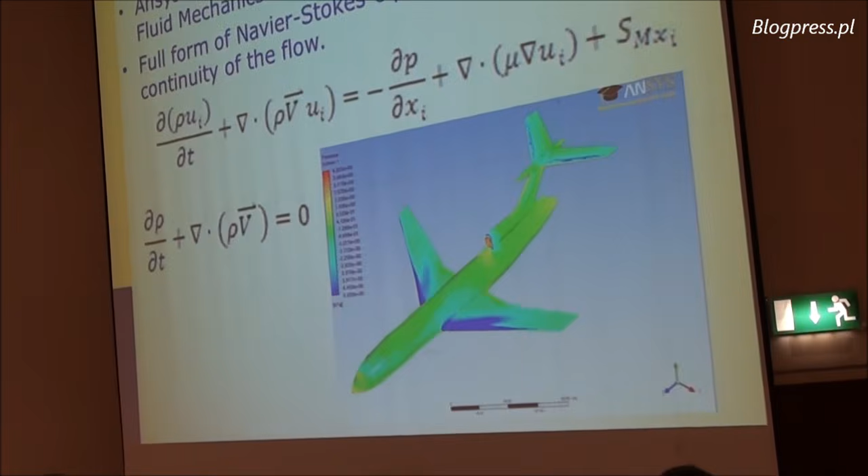As shown in here, my colleague from the University of Akron, Dr. Jack Brown, he is expert in aerodynamics. He used ANSYS CFX and calculated aerodynamic pressures, so we put those pressures on top of our loading conditions, and therefore we can show the simulations, how the computer predicts what would happen if this airplane would hit that birch tree. Again, assuming that I follow the official report.

So what you can see is that in each case, for every orientation of the airplane, basically the front edge is damaged, but then the birch is cut by the wing, and the airplane is flying away very quickly. The whole event takes 2/100ths of a second. Flight is 80 meters per second, so within 1 second the airplane goes 80 meters, right? So the contact with the birch before it is broken to pieces is just 2/100ths of a second. It's very quick, very dynamic situation.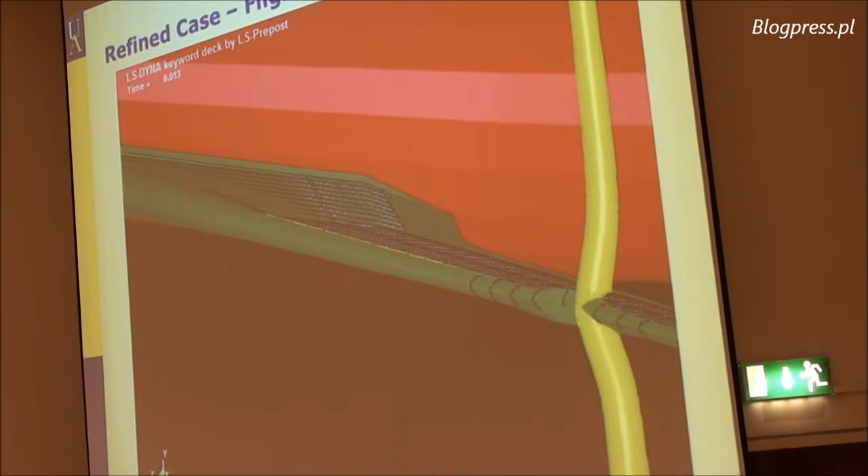So you can see in every case, for every model, some of them are more linear, more non-linear, but you have the same effect. The birch tree is broken, and the upper part, due to dynamics, has to fall in the direction of the flight. There's no other way. This was also proven by the Bacelli experiment. What is interesting is that in Smolensk, the birch is laying perpendicular to the direction of the flight, which cannot be explained physically at all.

I look from the bottom of the surface of the wing, and I can see that there's no contact with the lower part of the tree, again because there's so much inertia involved and it's a dynamic event, that the wing has to just cut this tree and go away. But always the front edge is damaged. So no matter what, the front edge is damaged.

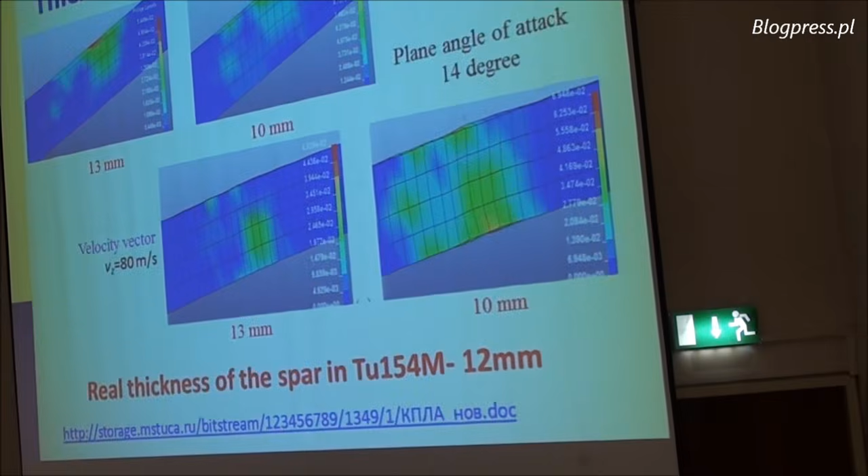I did calculations for different thicknesses of spars, different thicknesses of ribs and skin of the airplane, and in every scenario I calculated, I had the same results, that if the airplane would really hit this tree, the tree would be cut in half and should fall down in the direction of the flight of the airplane, but in fact it is not the case.

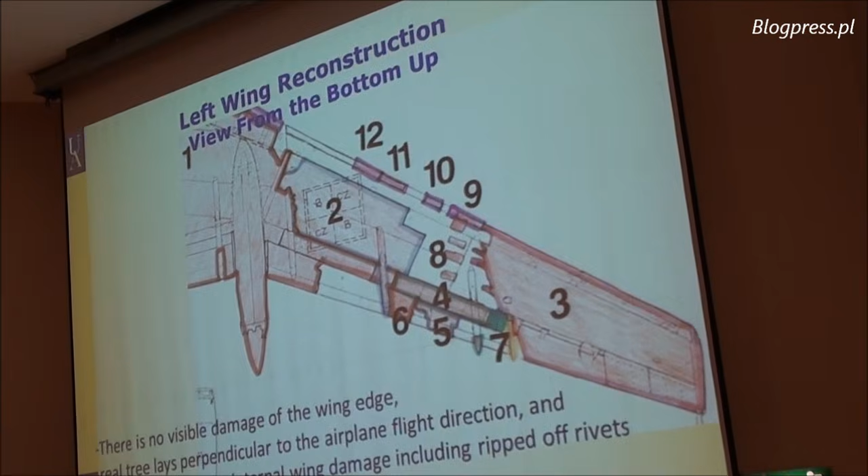If you look at the debris and put it together and reconstruct the airplane wing, this is the part that was flying away, but the front edge is not damaged. This is supposed to be the damaged part when the tree is supposed to cut through the airplane. But the so-called slots, you can see they are not damaged in that location. However, you have a big hole here. So how can you rip a big hole in the middle of the wing without damaging the front edge? Definitely not by a tree, but yes, you can do it if you have an explosion in this area. Then this part is just flying away because it's not connected to anything.

Professor Cieszewski also recently bought some of the satellite pictures again, and he found the location of that tree with respect to other objects. This is the magnification of the tree from the 12th of April and 11th of April, when we know it's broken. Through the low resolution of the satellite picture, unfortunately, you can see the white spot of the trunk of the birch tree, which is white. And on January 26, this tree was standing.

He's the forester, he's the expert in reading satellite pictures. He did it together with his colleagues at the University of Georgia, and all 5 professors agreed that this is a standing tree and this is a broken tree. So here you don't see any white because looking from the top, at the branches, you don't see the trunk, it is all dark. So then he found the picture from April 5.

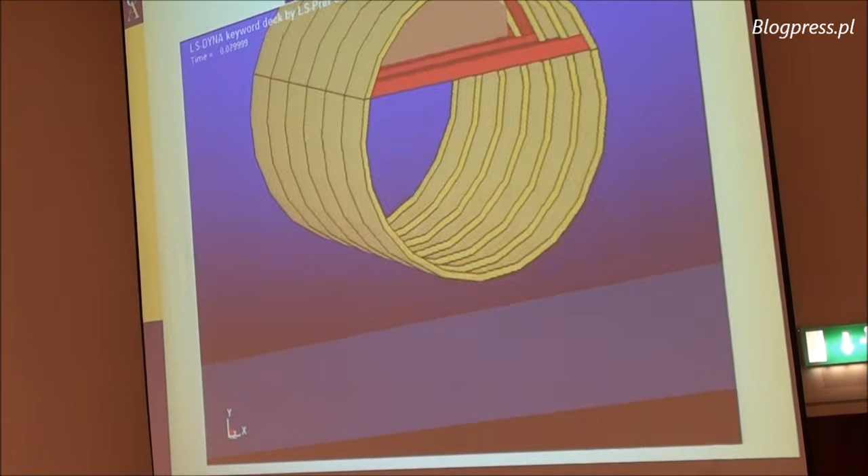Well, I also did some simulations of a fuselage that is dropping down upside down. So you can see the red wall, the floor of the fuselage, and no matter how I drop this fuselage, with the angle of rotation or without, either one wall or the other wall and ceiling is broken under the floor. But people from Sandia National Lab did the same calculation of the behavior of the fuselage.

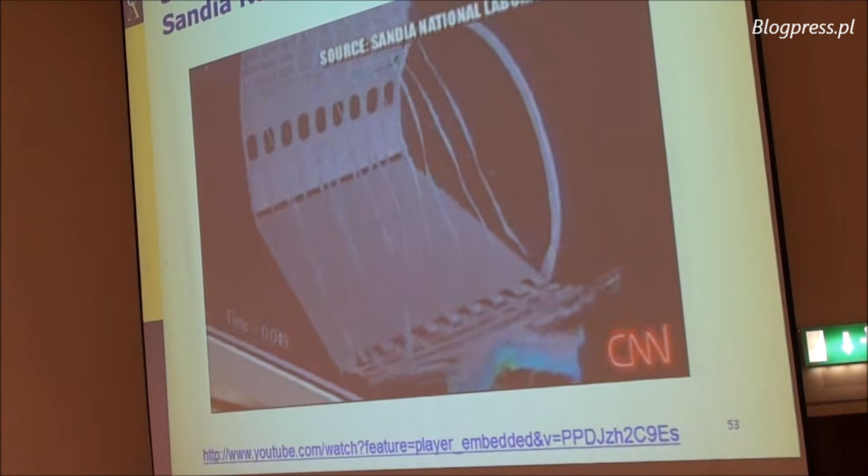What will happen, how this fuselage will behave if you apply explosives inside. So these are the results shown in 2008 by Sandia National Lab, and the pressure from the explosive rips the fuselage and opens it outside. So if you have an explosion in the air, you rip off the fuselage axially, and the ceiling and wall go on both sides of the airplane.

So this is one of the debris of the fuselage in Smolensk. You can see the floor, this is the bottom of the airplane, this is one wall, this is another wall and ceiling. So that, to me, represents the situation that was done by Sandia National Lab, not the one that I did before when I crashed this particular fuselage without explosives.

So I did explosives as well, upside down, and indeed you can see that the ceiling and wall go on one side and the other wall goes on the other side. And then you have the situation as captured by the photographs of the debris in Smolensk.

The last analysis that I did was, okay, I'm a stubborn person, so I wanted to do all the calculations based on the official report that says that the airplane lost the wing, and its whole mass hit the soft ground because it was very soft, wet ground without any stones, bricks or rocks. So my simulations of the whole mass of the airplane, depending on the angle of hit, with 80 meters per second, produce a crater.

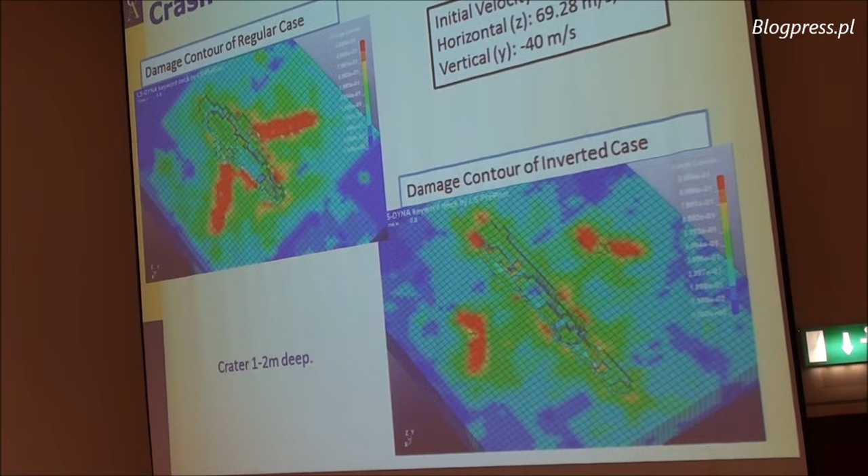Okay. Again, you are talking about 78 tons of mass hitting soft ground at 80 meters per second. It's normal that you can expect a crater. So the crater should be about 1-2 meters deep, and the width should be bigger than the width of the fuselage, or maybe even bigger than fuselage and wings, and it should be very long. Depending on the orientation, it could be more than 100 meters long.

I did this with the airplane coming down with the wheels down, and later on an experiment was shown using a Boeing 727, and the Boeing 727 is very similar to the Tupolev. You can see both dimensions and weights in the table shown over here. So any accidents involving the Boeing 727 are very interesting.

This is one of the reports of the JFK crash when the Boeing 727 hit the lighting towers in 1975 with the left wing. You can see that the airplane contacted the top of the number 7 approach light tower at an elevation of 27 feet above the mean low water level and 2,400 feet from the threshold of runway 22L. The aircraft continued and struck towers 8 and 9.

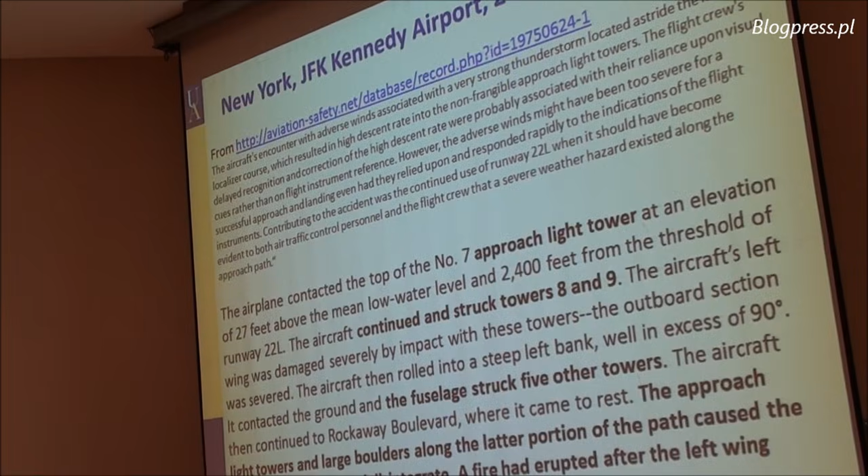The aircraft left wing was damaged severely by impact with these towers. The outboard section was severed. The aircraft then rolled into a steep left bank, well in excess of 90 degrees. It contacted the ground and the fuselage struck 5 other towers. The aircraft then continued to Rockaway Boulevard where it came to rest. The approach light tower and large boulders along the latter portion of the path caused the fuselage to collapse and disintegrate. A fire had erupted after the left wing failed.

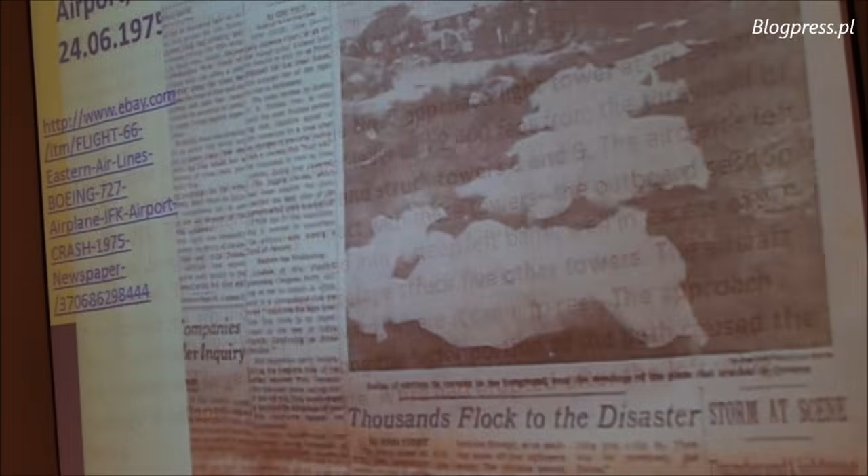Okay? So it is kind of a similar scenario to the one presented by the Russians. However, you can also read from the newspapers that in this plane, despite the fact that it hit those multiple towers, some people survived. 109 of 122 on the plane feared dead. So about 11 people survived, including 2 children. You can see how these towers look.

This is another experiment done with a Boeing 727 in 2012, where it was equipped with dummies and sensors without any human being inside, and the objective was to cause the crash of this airplane. The airplane hits with a higher vertical velocity than the Tupolev, and breaks into 3 pieces. Of course, if you are a human being and you are flying in business class, I'm sorry, you are dead.

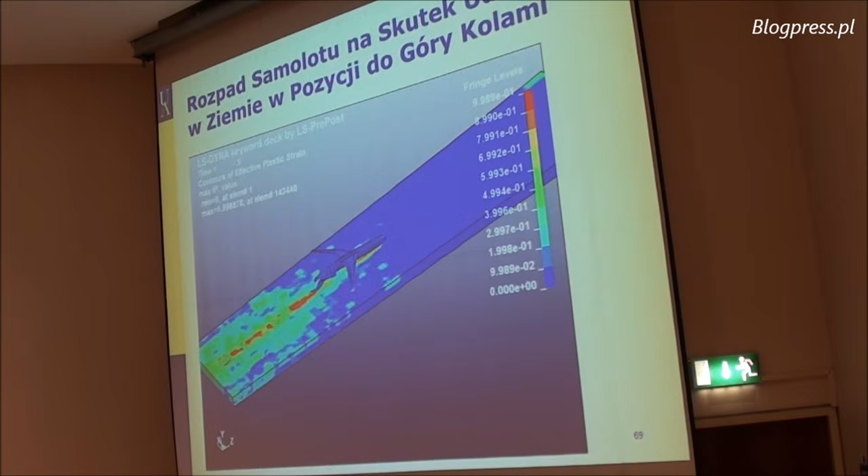So we made simulations. You can see how this crater and the disintegration of the airplane happens if it is flying upside down. These are all very expensive simulations. It takes months of calculations on a good computer to get results because of the explicit nature of the calculations. What is interesting is that in this case we found that at least one wing should survive. There's no reason that both wings would be damaged. One was damaged because of the tree, but why the other is damaged, there's no reason whatsoever.

Now, in the official report, it says that the airplane really hit not completely upside down, but kind of on the left wing, on the broken wing. So, in fact, this is even better, giving more survival chances for the airplane.

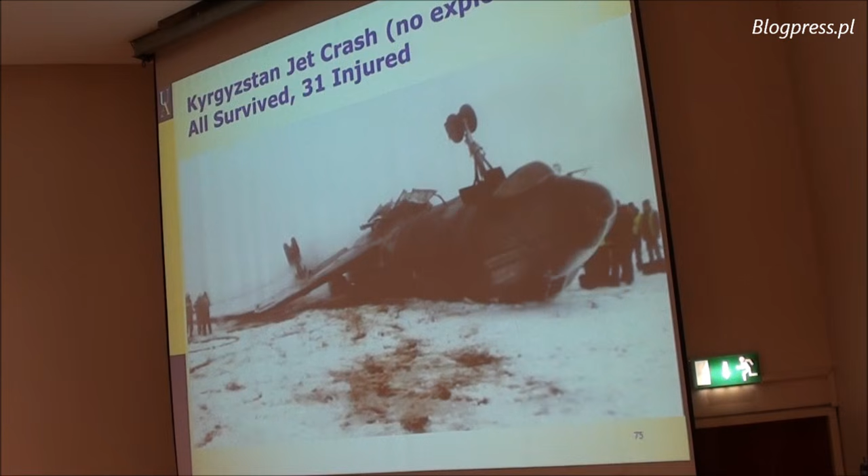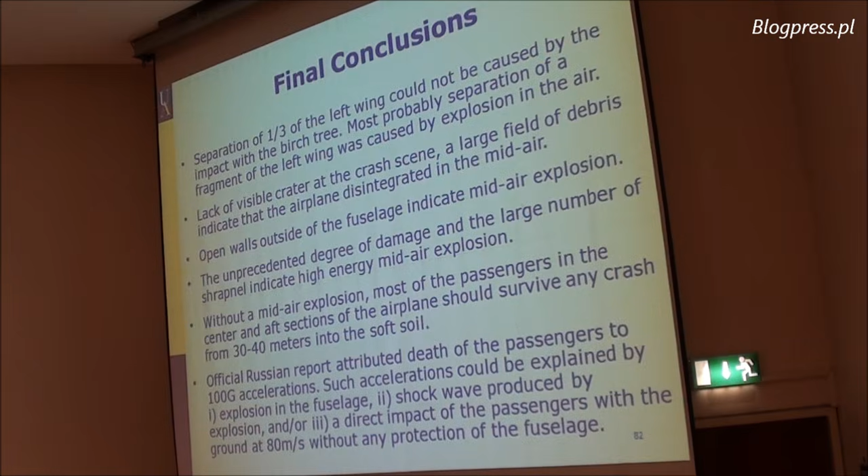Basically, the conclusions can be that a separation of 1/3 of the wing could not be caused by the impact with the birch tree. Most probably separation of a fragment of the wing was caused by an explosion in the air. Lack of a visible crater at the crash scene and a large field of debris indicate that the airplane disintegrated in mid-air. And then those parts, not as one mass, but as a rain of parts, fell down, therefore they didn't create any crater. Walls opened outside of the fuselage indicate a mid-air explosion.

The unprecedented degree of damage and the large number of shrapnel indicate a high energy mid-air explosion. Without the mid-air explosion, most of the passengers in the center and in the aft section of the airplane should survive any crash from 30 to 40 meters into the soft soil. The official Russian report attributes the death of the passengers to 100 G acceleration. Such acceleration could be explained by an explosion in the fuselage, the shockwave produced by the explosion, and direct impact of the passengers with the ground at 80 meters per second without any protection of the fuselage.

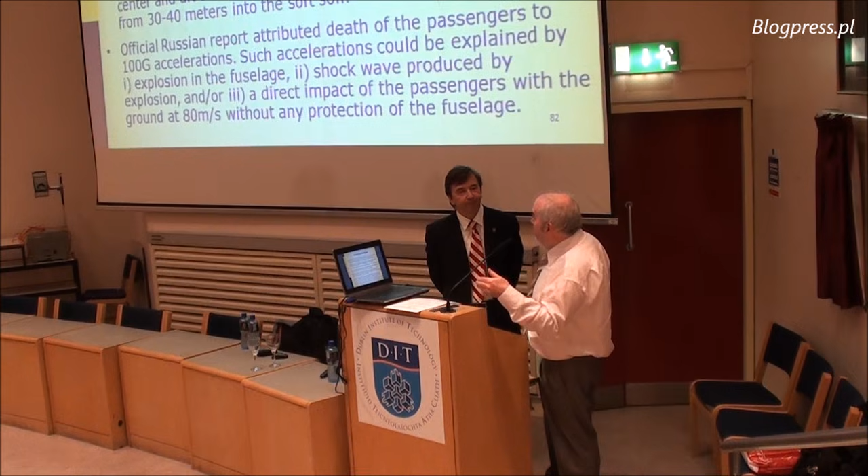The one question I would like to ask, just very simply, is I know with regard to Boeing 727s, there are designed production breaks within the fuselage which will cause it to split into three. I just wonder, does the Tupolev have a similar sort of structure in terms of the way it's designed? Yeah, Tupolev is much stronger. It has 3 spars, not 2 spars.

The reason is that technology in Russia is not as precise as it is in the Western countries, and therefore they produced first the same with 2 spars, but they found that they have too much deformation of the wing, and they equipped the 3rd spar into the wing of the airplane. So it's about 30% stronger. Great, thank you.